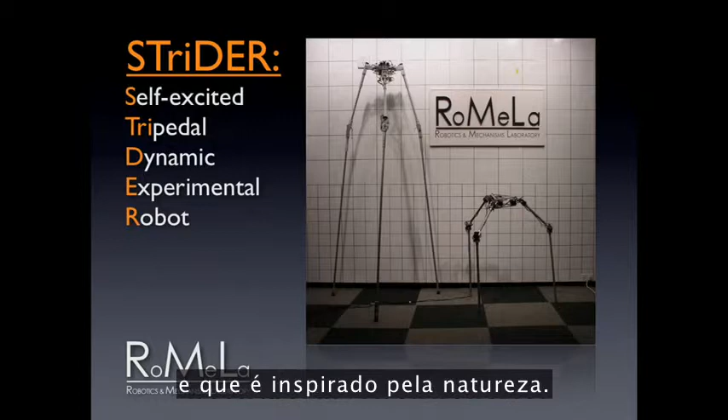So the first robot to talk about is called Strider. It stands for Self-Excited Tripedal Dynamic Experimental Robot. It's a robot that has 3 legs, which is inspired by nature. But have you seen anything in nature, an animal that has 3 legs? Probably not. So why do I call this a biologically inspired robot?

How would it work? But before that, let's look at pop culture. So, you know, H.G. Wells' War of the Worlds novel, a movie. And what you see over here is a very popular video game. And these fictions describe these alien creatures and robots that have 3 legs that terrorize Earth. But my robot Strider does not move like this.

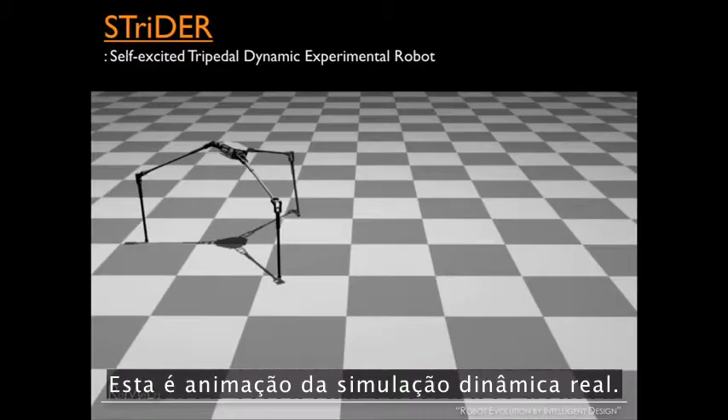So this is an actual dynamic simulation animation. It's going to show you how the robot works. It flips its body 180 degrees. It swings its legs between the 2 legs and catches the fall. So that's how it walks.

But when you look at us human beings, bipedal walking, what you're doing is you're not really using a muscle to lift your leg and walk like a robot, right? What you're doing is you really swing your leg and catch the fall. Stand up again, swing your leg and catch the fall. You're using your built-in dynamics, the physics of your body, just like a pendulum. We call that the concept of passive dynamic locomotion.

What you're doing is, when you stand up, potential energy to kinetic energy, potential energy to kinetic energy. It's a constantly falling process. So even though there's nothing in nature that looks like this, really we're inspired by biology and applying the principles of walking to this robot. Thus, it's a biologically inspired robot.

What you see over here, this is what we want to do next. We want to fold up the legs and shoot it up for long-range motion. And it deploys legs. It looks almost like Star Wars. When it lands, it absorbs the shock and starts walking. What you see over here, this yellow thing, this is not a death ray. This is just to show you that if you have cameras or different types of sensors, because it is tall, it's 1.8 meters tall, you can see over obstacles and bushes and those kinds of things.

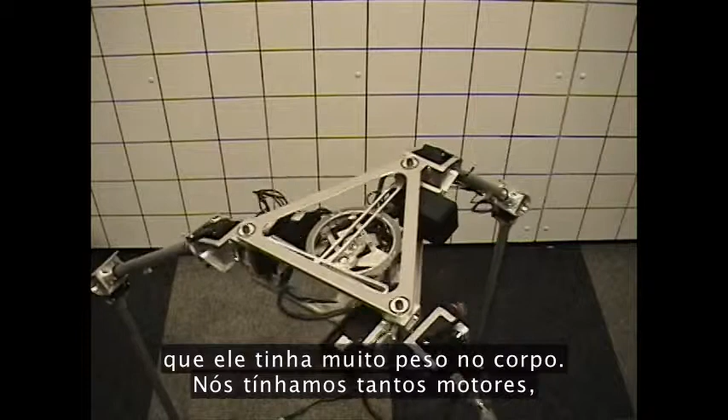So we have 2 prototypes. The first version in the back, that's Strider 1. The one in the front, the smaller one, is Strider 2. The problem that we had with Strider 1 is it was just too heavy in the body. We had so many motors, aligning the joints and those kinds of things. So we decided to synthesize a mechanical mechanism so we can get rid of all the motors, and with a single motor, we can coordinate all the motions. It's a mechanical solution to a problem instead of using mechatronics.

So with this, now the top body is light enough, so it's walking in our lab. This was a very first successful step. It's still not perfected. It constantly falls down, so we still have a lot of work to do.

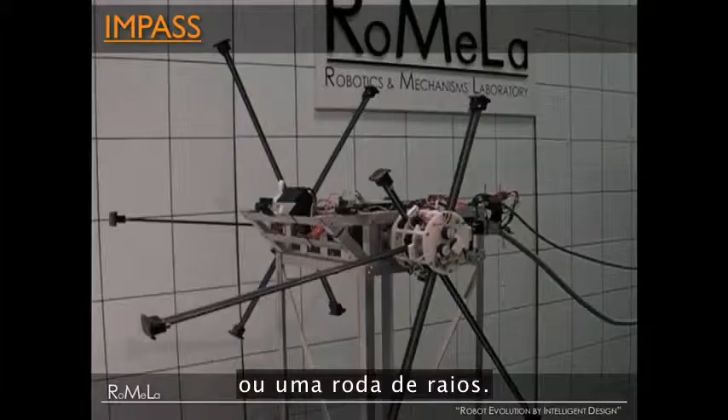The second robot I want to talk about is called IMPASS. It stands for Intelligent Mobility Platform with Actuated Spoke System. So it's a wheel-leg hybrid robot. So think of a rimless wheel or a spoked wheel, but the spokes individually move in and out of the hub. So it's a wheel-leg hybrid. We're literally reinventing the wheel here. Let me demonstrate how it works.

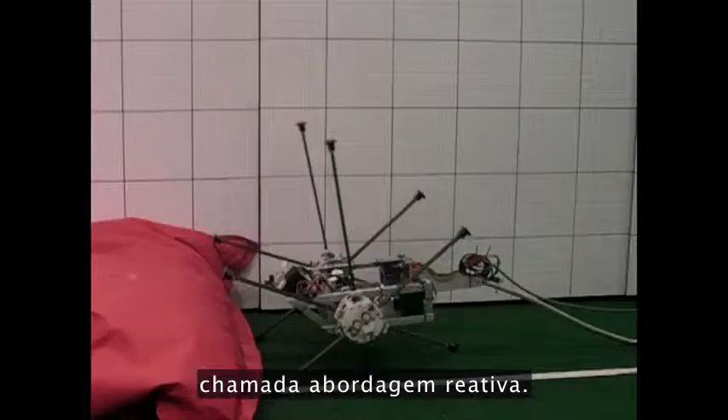So in this video, we're using an approach called a reactive approach. Just simply using the tactile sensors on the feet, it's trying to walk over a changing terrain, a soft terrain where it pushes down, it changes. And just by the tactile information, it successfully crosses over these types of terrain.

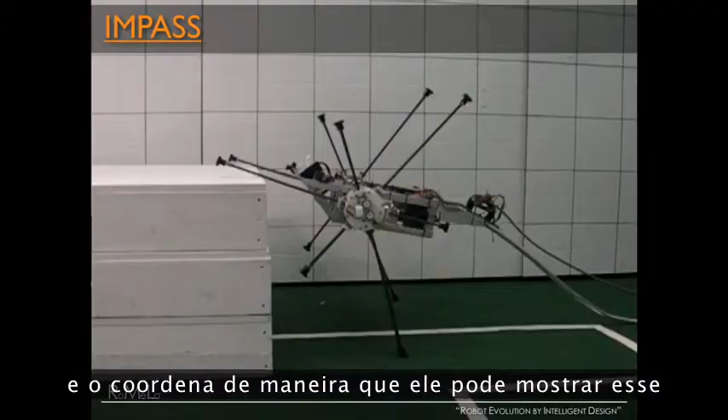But when it encounters a very extreme terrain, in this case, this obstacle is more than 3 times the height of the robot, then it switches to a deliberate mode where it uses a laser rangefinder and camera systems to identify the obstacle, the size, and it carefully plans the motion of the spokes and coordinates it so that it can show this kind of very, very impressive mobility. You probably haven't seen anything like this out there. This is a very high mobility robot that we developed called IMPASS.

Isn't that cool? When you drive your car, when you steer your car, you use a method called Ackermann steering. The front wheels rotate like this. For most of the small, wheeled robots, they use a method called differential steering, where the left and right wheel turn in the opposite direction.

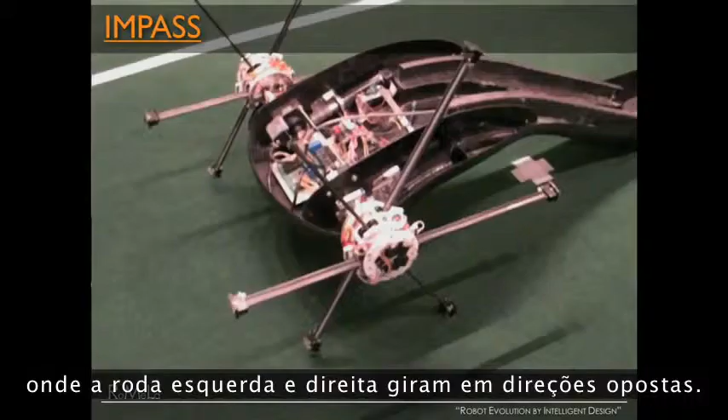For IMPASS, we can do many, many different types of motions. For example, in this case, even though the left and right wheel is connected with a single axle, rotating the same angular velocity, we just simply change the length of the spoke, effective diameter, and then you can turn to the left or to the right. So these are just some examples of the neat things that we can do with IMPASS.

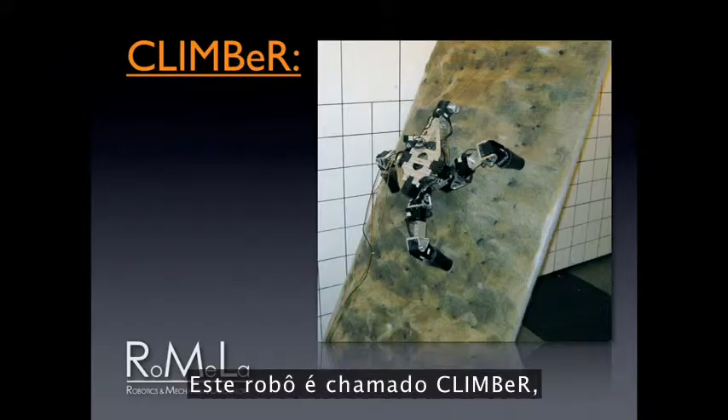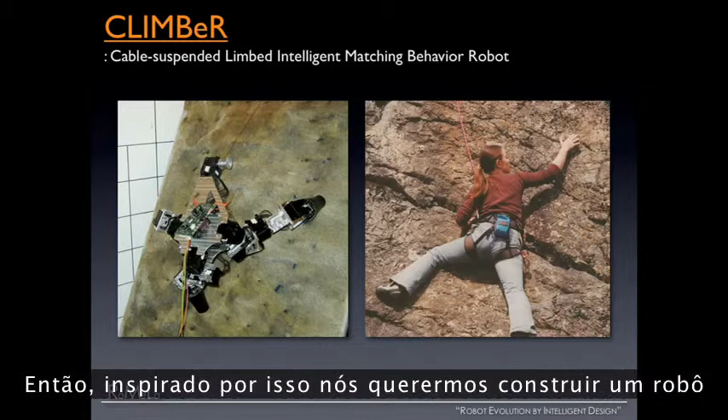This robot is called CLIMBeR. Cable-suspended limbed intelligent matching behavior robot. So I've been talking to a lot of NASA JPL scientists. JPL, they're famous for the Mars rovers. And the scientists, geologists, always tell me that the real interesting science, the science-rich sites, are always at the cliffs. But the current rovers cannot get there. So inspired by that, we want to build a robot that can climb unstructured cliff environment.

So this is CLIMBeR. So what it does, it has 3 legs. It's difficult to see, but it has a winch and a cable on the top. It tries to figure out the best place to put its foot, and then once it figures that out, in real time it calculates the force distribution, how much force it needs to exert to the surface so it doesn't tip and doesn't slip. Once it stabilizes that, it lifts the foot, and then with the winch, we can climb up these kind of steps. Also for search and rescue applications as well.

5 years ago, I actually worked at NASA JPL during the summer as a faculty fellow, and they already had a six-leg robot called LEMUR. So this is actually based on that. This robot is called MARS, Multi-Appendage Robotic System. So it's a hexapod robot. We developed our adaptive gait planner. We actually have a very interesting payload on there. The students like to have fun.

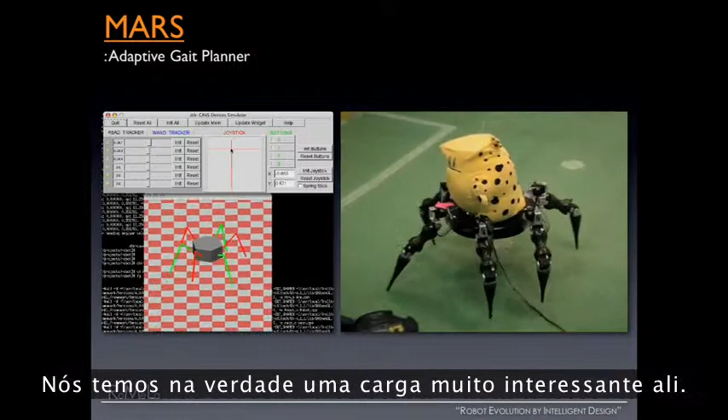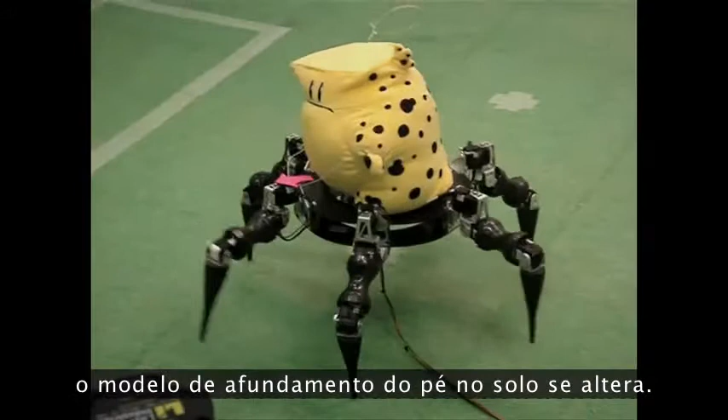And here you can see that it's walking over unstructured terrain. It's trying to walk on the coastal terrain, the sandy area. But depending on the moisture content or the grain size of the sand, the foot's soil sinkage model changes. So it tries to adapt its gait to successfully cross over these kind of things.

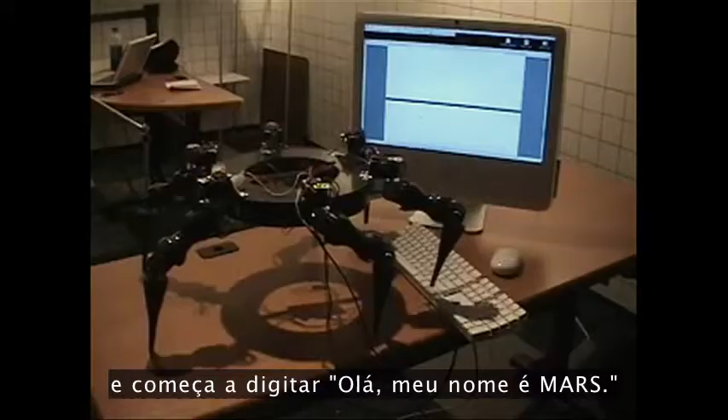It also does some fun stuff. As you can imagine, we get so many visitors visiting our lab. So when the visitors come, MARS walks up to the computer, starts typing, "Hello, my name is MARS. Welcome to RoMeLa, the Robotics and Mechanisms Laboratory at Virginia Tech."

This robot is an amoeba robot. Now, we don't have enough time to go into technical details. I'll just show you some of the experiments. So these are some of the early feasibility experiments. We store potential energy to the elastic skin to make it move, or we use active tension cords to make it move forward and backward.

It's called ChIMERA. We've also been working with some scientists and engineers from UPenn to come up with a chemically actuated version of this amoeba robot. We do something to something, and just like magic, it moves. It blobs, right?

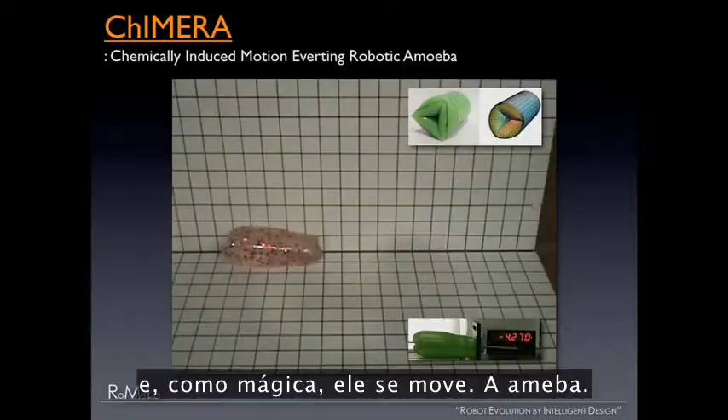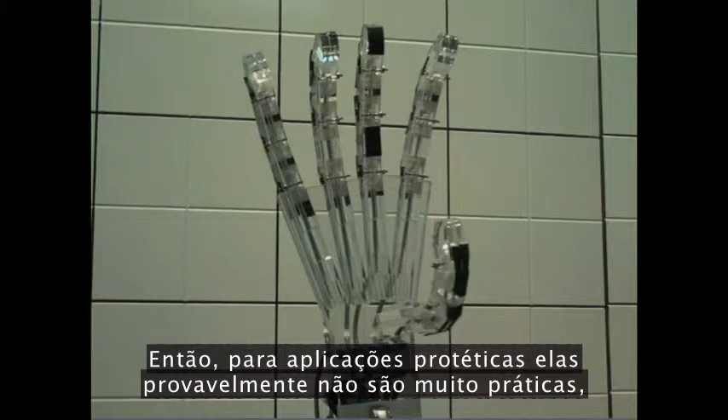This robot is a very recent project. It's called RAPHaEL, a robotic air-powered hand with elastic ligaments. There are a lot of really neat, very good robotic hands out there in the market. The problem is they're just too expensive, tens of thousands of dollars. So for prosthesis applications, it's probably not too practical because it's not affordable. We want to go tackle this problem in a very different direction.

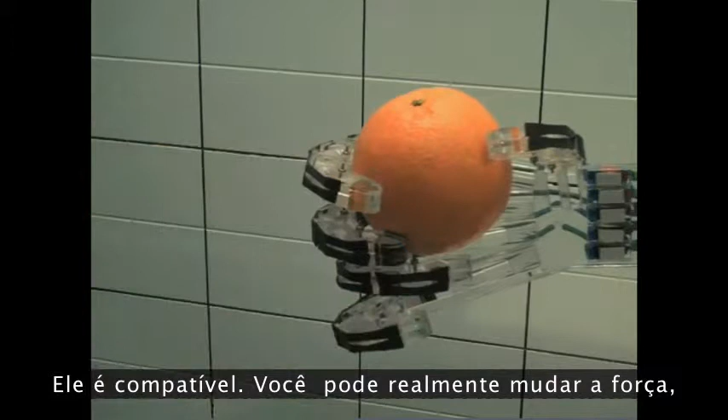Instead of using electrical motors, electromechanical actuators, we're using compressed air. We developed these novel actuators for the joints, so it's compliant. You can actually change the force, simply just changing the air pressure, and it can actually crush an empty soda can. It can pick up very delicate objects like a raw egg, or in this case, a light bulb. The best part, it took only $200 to make the first prototype.

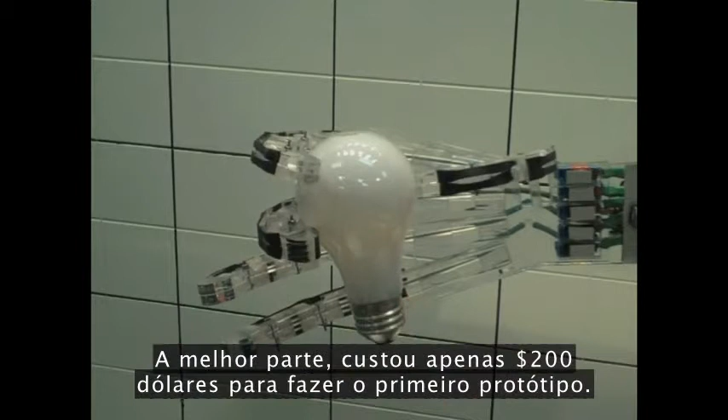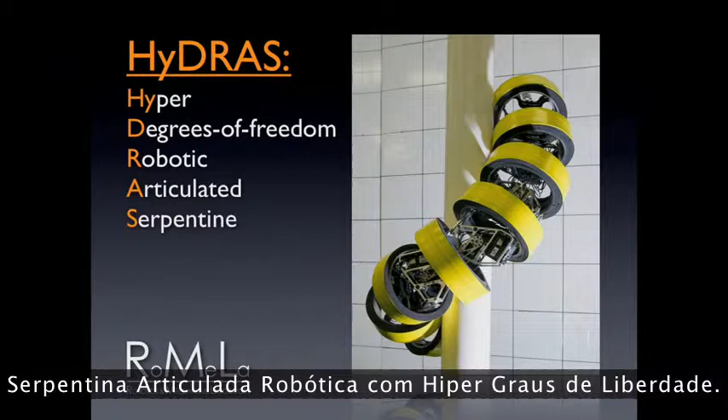This robot is actually a family of snake robots that we call HyDRAS, Hyper Degrees of freedom Robotic Articulated Serpentine. This is a robot that can climb structures. This is a HyDRAS arm. It's a 12 degrees of freedom robotic arm, but the cool part is the user interface.

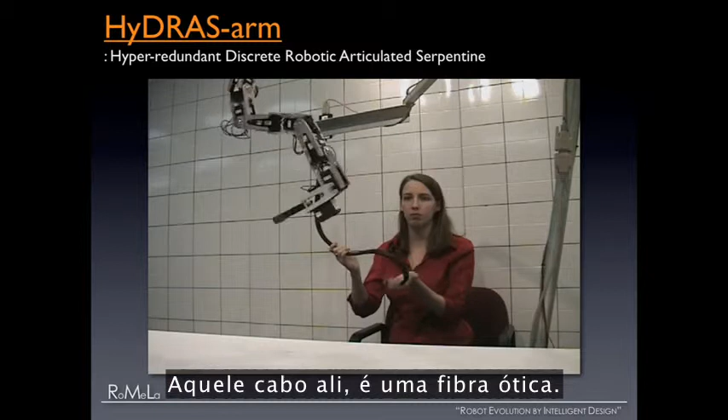The cable over there, that's an optical fiber, and this student, probably the first time using it, but she can articulate in many different ways. So for example, in Iraq, the war zone, there's roadside bombs. Currently you send these remotely controlled vehicles with an arm. It takes really a lot of time and is expensive to train the operator to operate this complex arm.

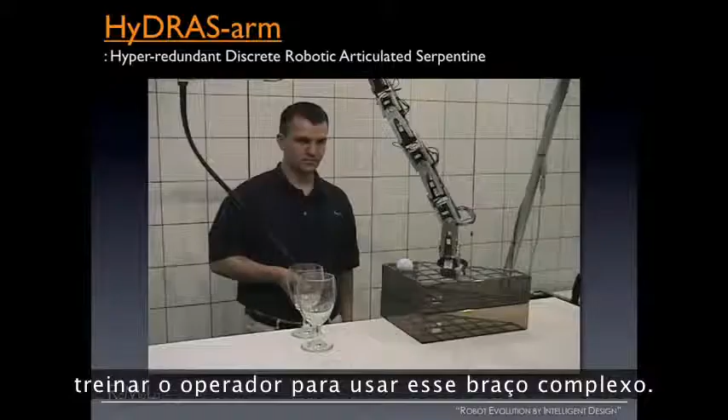In this case, it's very intuitive. This student, probably first time using it, doing very complex manipulation tasks, picking up objects and doing manipulation, just like that. Very intuitive.

Now, this robot is currently our star robot. We actually have a fan club for the robot DARwIn, Dynamic Anthropomorphic Robot with Intelligence. As you know, we're very interested in humanoid, human walking, so we decided to build a small humanoid robot. This is in 2004. At that time, this is something really, really revolutionary. This was more of a feasibility study.

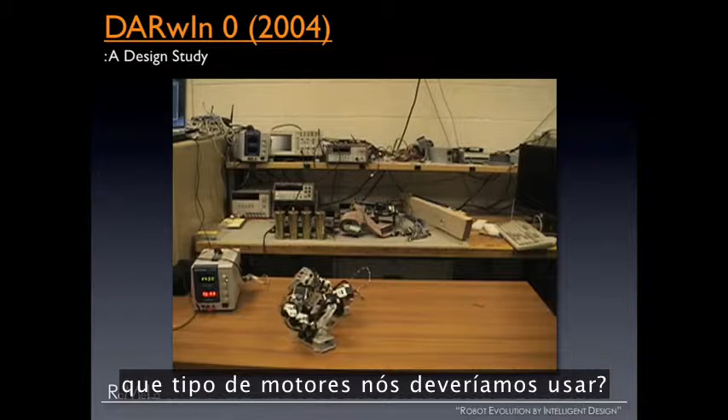What kind of motors should you use? Is it even possible? What kind of control should you do? So this does not have any sensors, so it's an open-loop control. And for those who probably know, if you don't have any sensors and there's any disturbances, you know what happens. Yeah? So based on that success, in the following year, we did the proper mechanical design starting from kinematics, and thus DARwIn 1 was born in 2005.

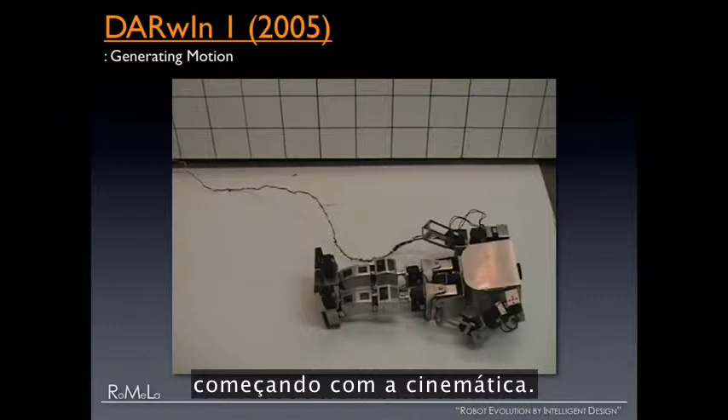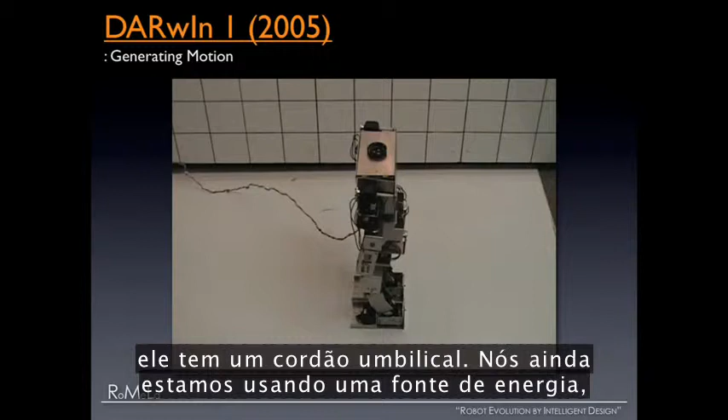It stands up, it walks, very impressive. However, still, as you can see, it has a cord, umbilical cord. So we're still using external power source and external computation. So in 2006, now it's really time to have fun. Let's give it intelligence. We give all the computing power it needs, 1.5 gigahertz Pentium M chip, two FireWire cameras, rate gyros, accelerometers, force torque sensor on the foot, lithium polymer batteries.

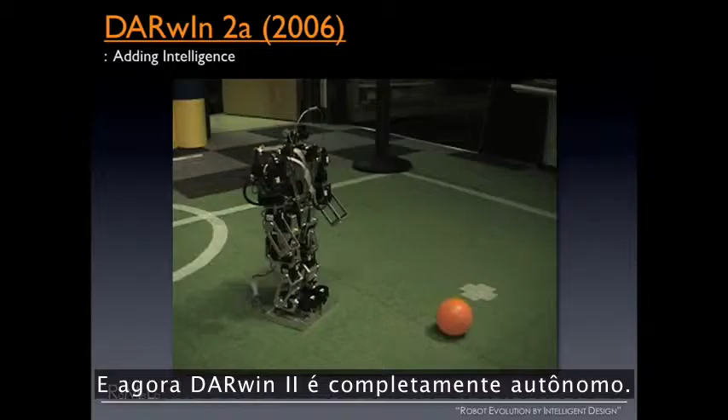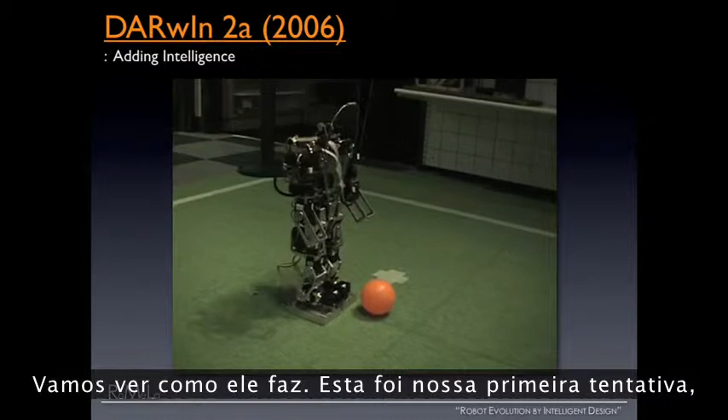And now DARwIn 2 is completely autonomous. It is not remote controlled. There's no tethers. It looks around, searches for the ball, looks around, searches for the goal, and it tries to play a game of soccer autonomously. Artificial intelligence. Let's see how it does. This was our very first trial, and yeah! Yes.

So there's actually a competition called RoboCup. I don't know how many of you heard about RoboCup. It's an international autonomous robot soccer competition. And the goal of RoboCup, the official goal is, by the year 2050, we want to have full-size autonomous humanoid robots play soccer against the human World Cup champions and win. It's a true official goal. It's a very ambitious goal, but we truly believe that we can do it.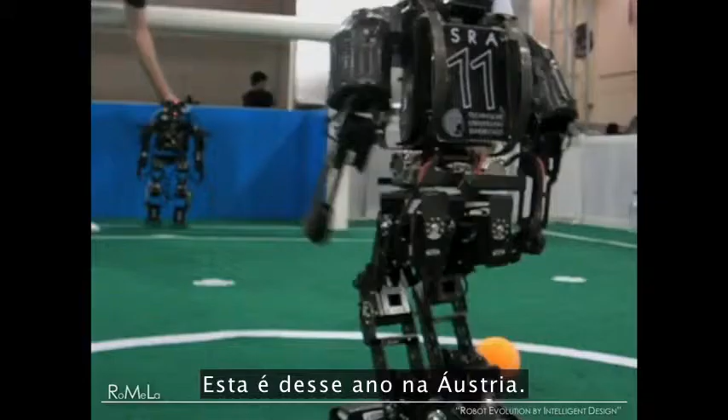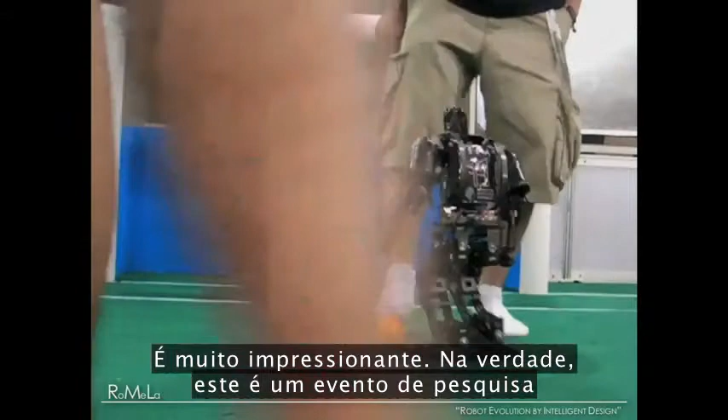So this is last year in China. We were the very first team in the United States that qualified in the humanoid RoboCup soccer competition. This is this year. This was in Austria. You can see the action of 3 against 3, completely autonomous. There you go. Yes. Now the robots track and they play team play amongst themselves. It's very impressive. It's really a research event packaged in a more exciting competition event.

What you see over here, this is the beautiful Louis Vuitton Cup trophy. So this is for the best humanoid, and we would like to bring this for the very first time to the United States next year, so wish us luck. Thank you.

DARwIn also has a lot of other talents. Last year, it actually conducted the Roanoke Symphony Orchestra for the holiday concert. This is the next generation robot DARwIn 4. Much smarter, faster, stronger. And it's trying to show off its ability. I'm macho, I'm strong. All right? I can also do some Jackie Chan motion, martial art movements.

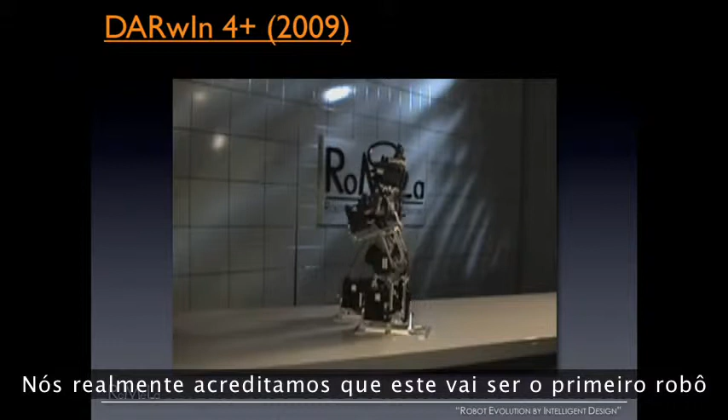And it walks away. So this is DARwIn 4. You'll be able to see it in the lobby. We truly believe this is going to be the very first running humanoid robot in the United States, so stay tuned. All right, so I showed you some of our exciting robotics work.

So what's the secret of our success? Where do we come up with these ideas? How do we develop these kinds of ideas? We have a fully autonomous vehicle that can drive in the urban environment. We won $500,000 in the DARPA Urban Challenge.

We also have the world's very first vehicle that can be driven by the blind. We call it the Blind Driver Challenge. Very exciting, and many, many other robotics projects I want to talk about. These are just the awards that we won in fall 2007 from robotics competitions and those kinds of things.

So really we have 5 secrets. First is, where do we get inspiration? Where do we get this spark of imagination? This is a true story, my personal story. At night when I go to bed, 3, 4 a.m.

in the morning, I lie down, close my eyes, and I see these lines and circles and different shapes floating around, and they assemble, and they form different kinds of mechanisms. And I'm like, oh, this is cool. So right next to my bed, I keep a notebook, a journal, with a special pen that has a light on it, LED light, because I don't want to turn on the light and wake up my wife. So when I see this, I scribble everything down, draw things, and I go to bed.

Every day in the morning, the first thing I do before my first cup of coffee, before I brush my teeth, I open my notebook. Many times it's empty. Sometimes I have something there. If something is there, sometimes it's junk, but most of the time, I cannot even read my handwriting. It's 4 a.m. in the morning. What do you expect, right? So I need to decipher what I wrote.

But sometimes I see this ingenious idea in there, and I have this eureka moment. I directly run to my home office, sit at my computer, I type in the ideas and sketch things out, and I keep a database of ideas. So when we have these calls for proposals, I try to find a match between my potential ideas and the problem. If there's a match, we write a research proposal, get the research funding in, and that's how we start our research programs. But just a spark of imagination is not good enough.

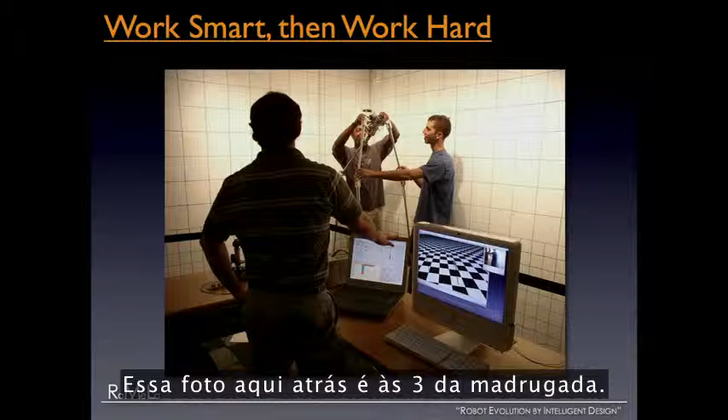Also, it's not only about that. You also have to work really, really hard. So I always tell my students, work smart, then work hard. This picture in the back, this is 3 a.m. in the morning. I guarantee you, if you come to our lab at 3, 4 a.m., we have students working there, not because I tell them to, but because we're having too much fun, which leads to the last topic.

Do not forget to have fun. That's really the secret of our success. We're having too much fun. I truly believe that the highest productivity comes in when you're having fun, and that's what we're doing. And there you go. Thank you so much.